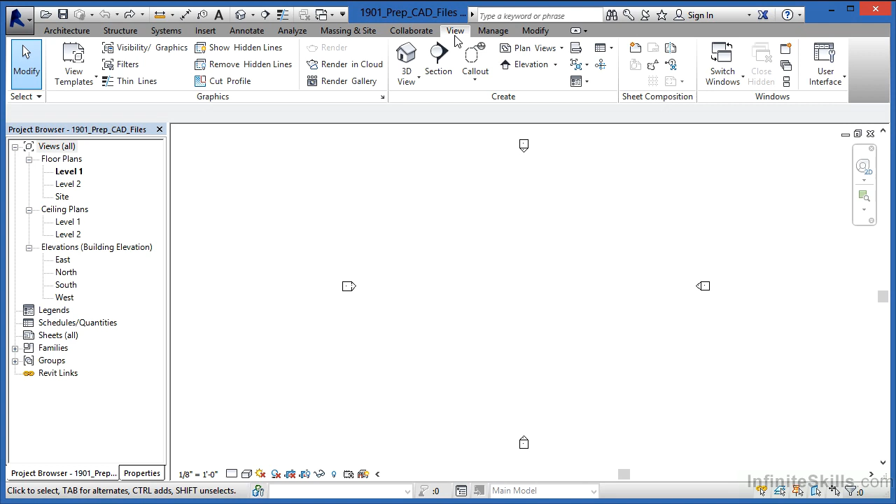Now to accomplish this, you need to begin by creating that drafting view. Because it's a drafting view, we'll find that under the View tab on the ribbon by selecting Drafting View. It'll ask for the name of that drafting view, and that'll be the name it shows up under in the project browser over on the left-hand side. In this case, I'm going to call it a garage detail. It's not the most descriptive name, but it is accurate. It is a detail of part of the garage.

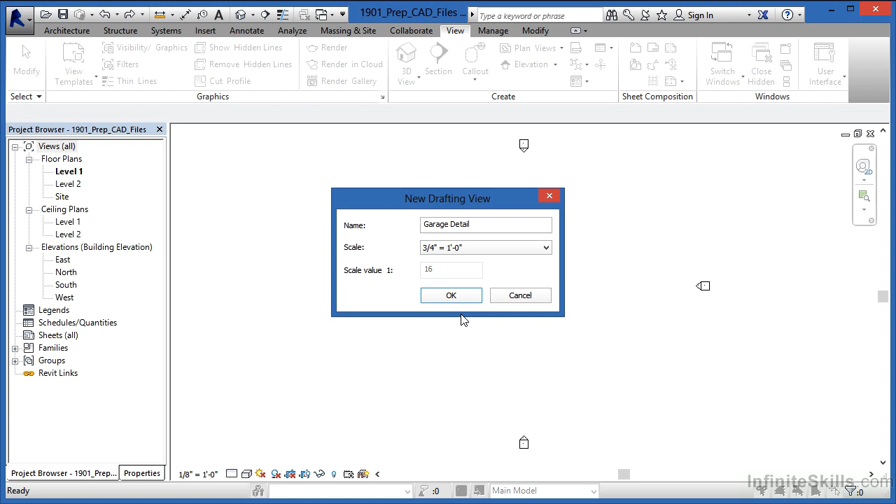Next, we have the scale, and I know that this is 3/4 of an inch equals a foot. And click on OK. It's now created a new Drafting Views category under the project browser, and if you expand it out by clicking on the little plus sign, you can see that this is a garage detail. It's now 3/4 of an inch equals a foot, and it's just a blank drawing area right now.

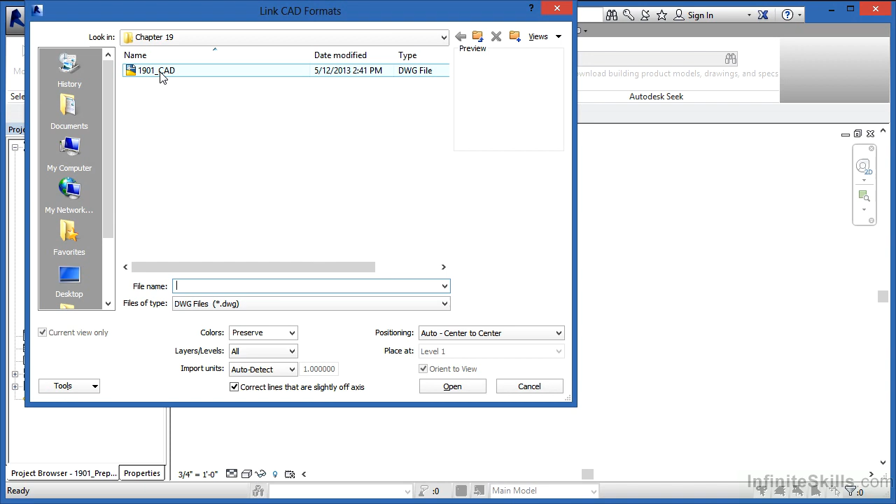To insert that CAD information, we come to the Insert tab, and we have one of two different ways we can bring that CAD information in. We can either link it in, or we can import it in. If you link it in, and I'll do this as an example, you'll then have the ability to select that CAD detail that you want to bring in. In this case, it's named 1901 CAD. From here, click on Open. Give it a few seconds to process.

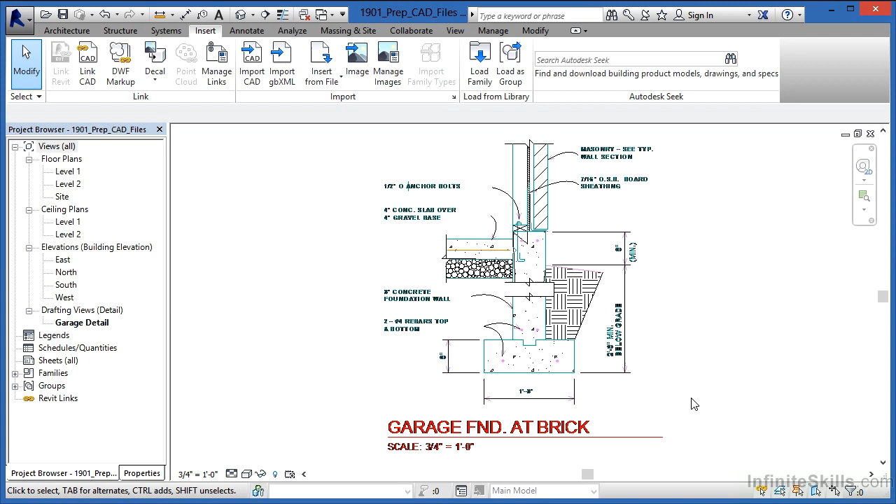The next thing to do will be to either type in the letters Z, E, or double-click really quick with the wheel on your mouse, and that will zoom extents so you can see that entire detail. If this is good enough, at this point you can place it in your drawing and start to print it. More than likely, you want to do some cleanup of this, and the reasoning is that this isn't really your typical Revit font. Most likely, your Revit arrows probably don't look like this. If you zoom in, you'll start to see some oddities like this little arc stops right here instead of coming all the way on over.

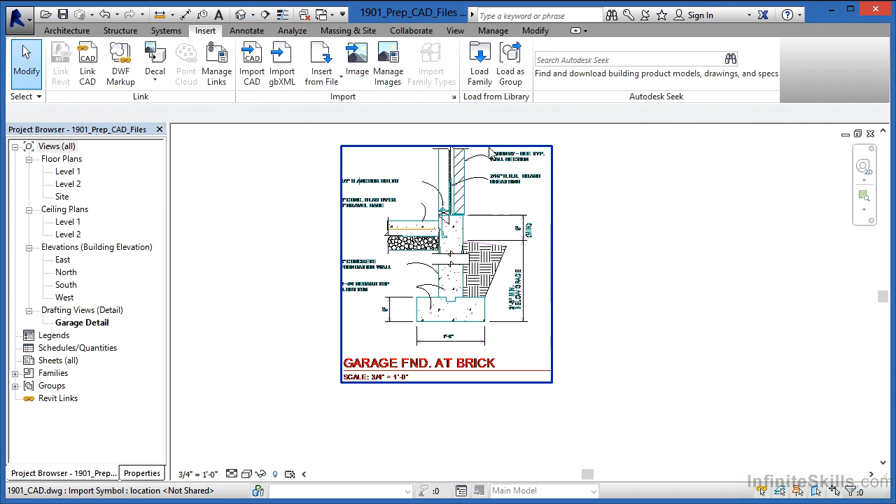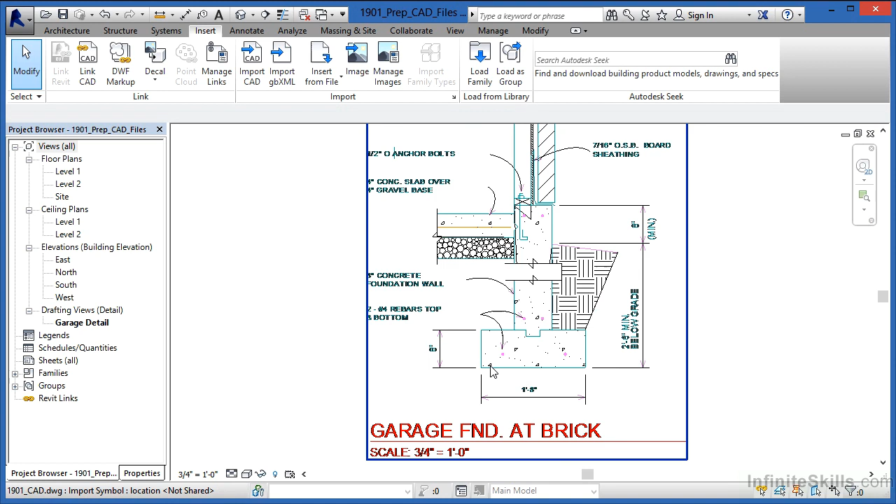So there's going to be a lot of cleanup that needs to happen in here, and really, if it's a linked file, it's difficult to clean it up inside of this environment. What you can do, though, is trace over a linked file, and you can use your drawing tools to draw lines by picking the endpoint of a line to the next endpoint of the line, and just start to sketch right over the top of it. Then whenever you're done, you can highlight it and click the Delete key on your keyboard, or just right-click and go to Delete in order to remove that detail.

At that point, because you traced over the top of it and put in your text, you'll have an exact copy of that detail just redrawn inside of Revit. The nice thing about doing that with the link is that you know that you get all the lines exactly right. You don't have to do much measuring. It's just click, click, click, and fill in the information without having to be amazingly accurate, because the accuracy is already drawn for you inside of the original CAD detail.

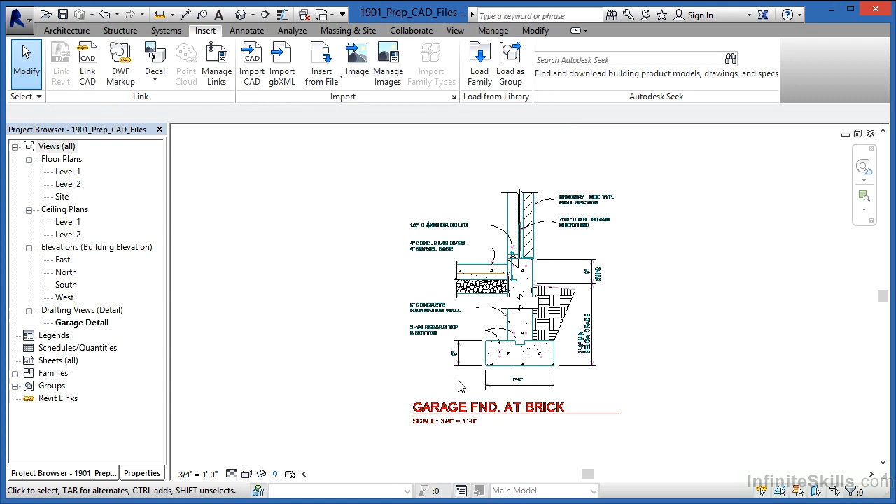Now, the other thing that you could do instead of linking it in and then being forced to just trace over the top of it is you can import the CAD information in. If you do this, you can select that CAD file just like we did before, and click on Open. In this case, we didn't have to zoom out because we already were zoomed out. If I select it, it looks exactly the same as it did before, but we now have something special, and that's called Explode. If you select where the word Explode is, there are two different options. One is Full Explode, and then there's Partial Explode.

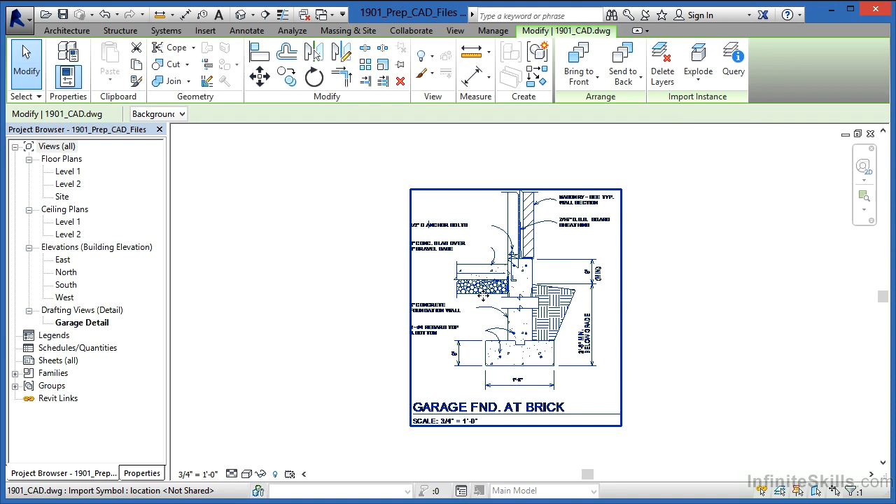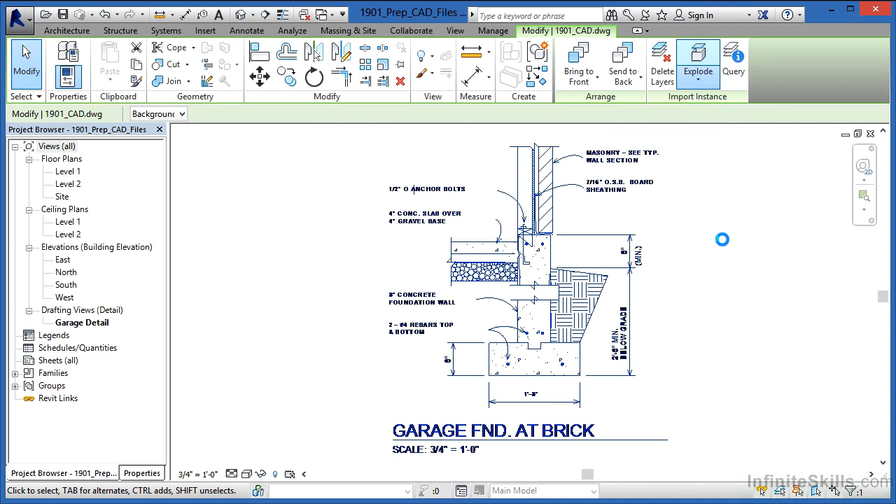The Full Explode will explode everything. And when I say everything, that includes down to each and every line that makes up these circles in the gravel. It will explode these patterns here, so each of these little tiny lines that make up the concrete symbol would be individual lines. In short, it'd be a big mess inside of this detail. On the other hand, the other option is a partial explode. You'll get a warning message, and you can close that warning message down.

What the warning message said is that this originally came from a drawing that had three-dimensional information in it, and you can't bring that three-dimensional information into a drafting view. Are you okay with that? And by clicking on OK, it just got rid of that three-dimensional information.

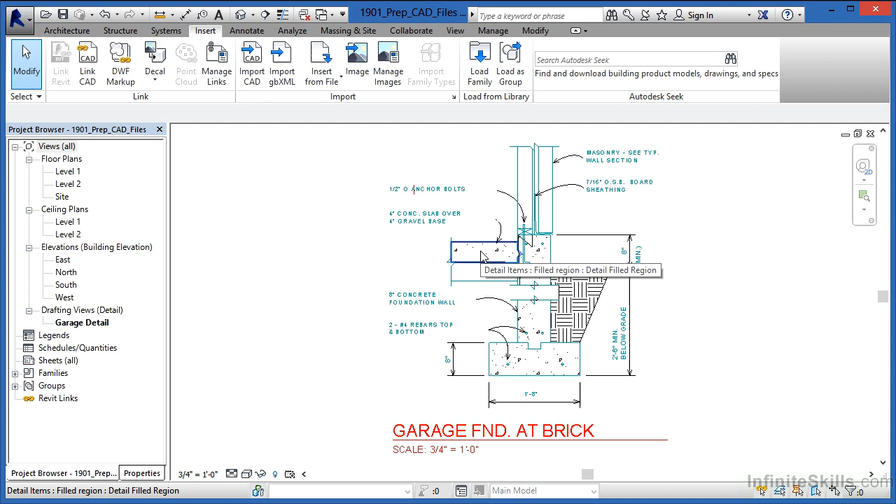Here, we can see that if we highlight over any of these pieces, things like the title can be highlighted, the dimensions can be highlighted, and I'll call it a hatch pattern because that's what it originally was in AutoCAD, but it's now a fill pattern in Revit. It's all one piece. It's not individual pieces of concrete, for instance. There is a problem, though. Let's take a look at this arc.

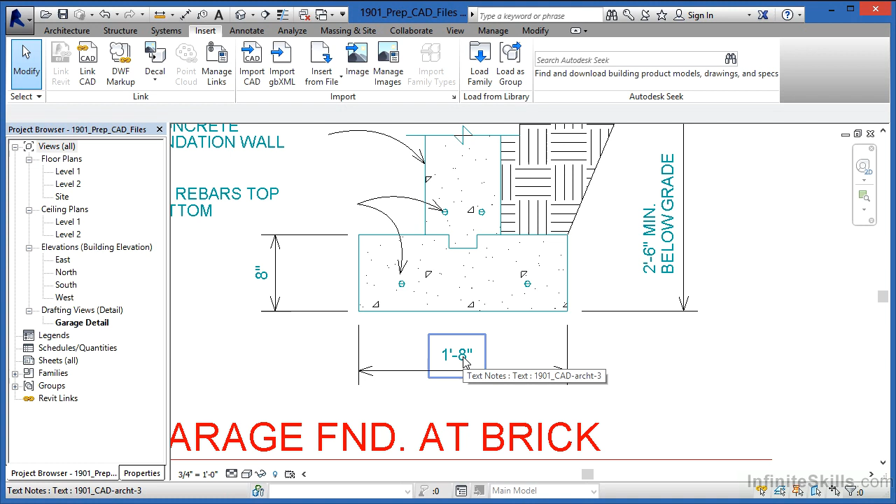Each individual lines and not a true arc. This arrowhead is no longer an arrowhead. It's line work that looks like an arrowhead. Your dimensions are the same way. Your leaders. Everything that might be part of a dimension that was brought in from that AutoCAD environment is now an individual line. Even the text, which would have been multi-line text, may be showing up as being just a

single line text. Now, one thing that you can do is select on any of these pieces of text, come in here to your Properties dialog, and then change it on the Type Selector list to be an appropriate size font, such as 3/32. And you could do this throughout.

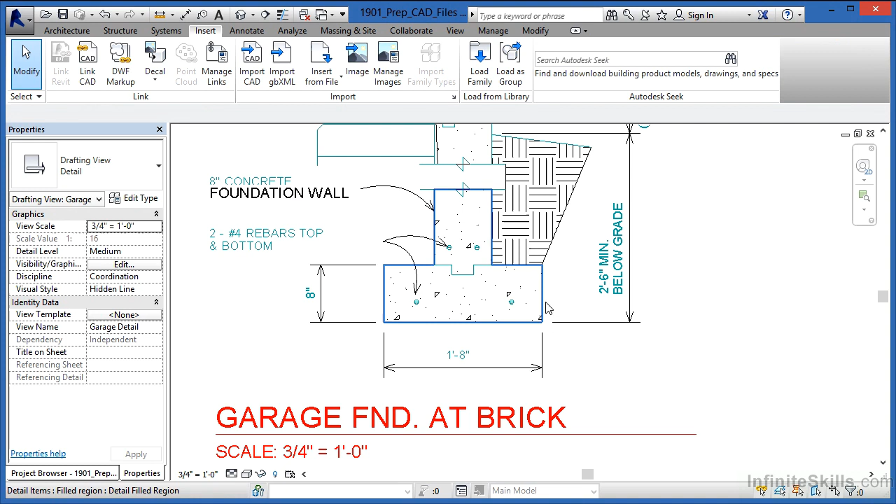The only problem is, as you come in and you window around these things, you pick on the different text sizes that you want to have, you start to see how these get to be spaced a little closer than what you'd like. So you'd have to take the time to pull these apart, move these to the right locations, so that they start to have the right look and feel to them.

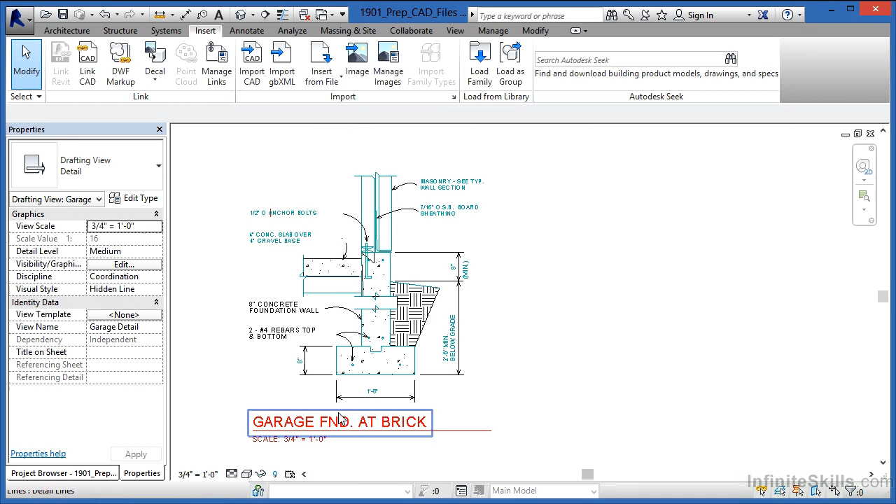As far as I'm concerned, the only thing that's really good about that procedure is the fact that you do get these individual lines as well as the fill patterns, and they're still available to you. It means that you don't necessarily have to recreate such things as the fill patterns. You don't have to redimension each and every one of these because they're already dimensioned appropriately.

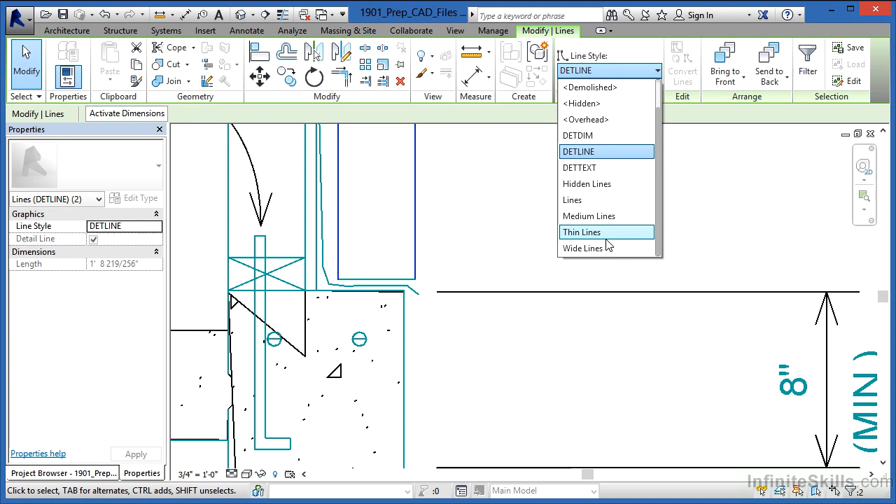All you need to do is select on each of these items and then pick where you have your different detail lines and tell it that you want it to be a certain line or certain line weight. For instance, and I realize this is a little bit odd, I'm going to pick wide lines for this, just so you could see a fairly dramatic difference here on the screen. See how that's a lot thicker now?

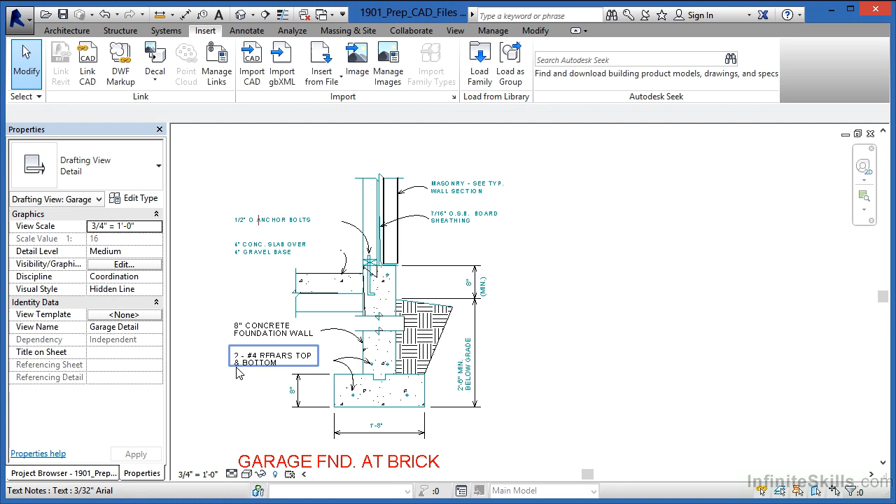And you could go through this on all the lines that make up this detail and give them the appropriate line weights without having to redraw it from scratch. But the things you will need to redraw from scratch are going to be the text, the arrows. Otherwise, it's just never going to look right, or you'll be spending half your day trying to move these around, when in reality, you could have come in, just used your text commands from underneath Annotate, and just renoted the entire thing in a matter of minutes.

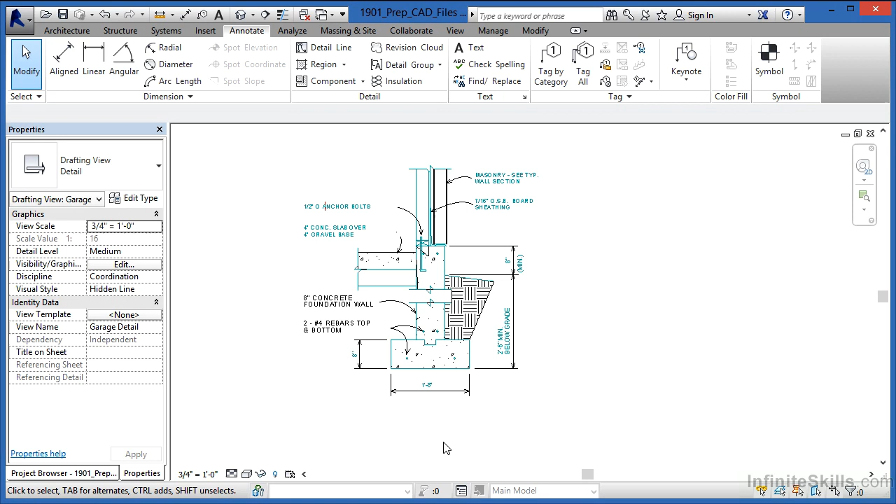One other thing that you should do, if you bring these in, you should always get rid of the title that's associated with them. And then you can just hit the delete key after you've highlighted on those entities. The reasoning is, this is a drafting view. Because it's a view, the second you pull it onto a sheet, it'll automatically have a title generated for itself.

So, to kind of wrap this up and talk a little bit more about what it is that we did, if we want to bring in your CAD information, you probably want to have them in a drafting view. Second, you may want to just link it in if you want to trace over the top of it using your drawing commands found underneath Annotate.

Also, if you instead decide to import it so you can use the existing line work without having to redraw it, remember you're going to have to highlight over all this stuff and then delete it, get rid of it. Get rid of your dimensions, get rid of your text, and probably renote the entire thing so that it looks right and meets your company standards.

Both of these processes sound like they take a long time. The reality of it is that for most CAD details, you can usually completely redo it in less than 5 minutes. The only issue with that is that when you bring in your CAD details, your CAD information, just remember you should always get rid of the CAD information because it's not going to meet your standards. And the second reason is that CAD information can also lead to instability issues in your Revit models.

Autodesk once said that about 85% of all the issues that they have inside of the software program, if that Revit file doesn't want to open, if Autodesk gets them, they will strip the AutoCAD information out. 85% of the time, that's what's causing the issue inside of the Revit file.

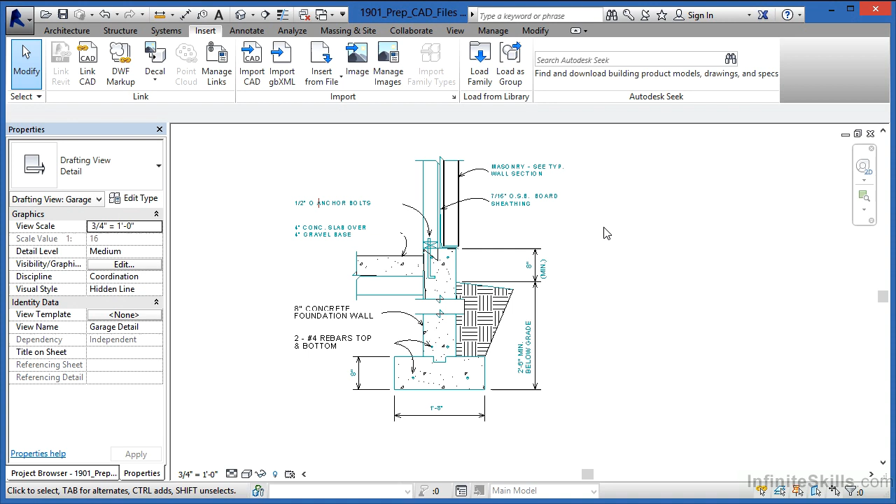So it gives you a little bit of a background as to bringing in this CAD information is fine. Tracing over it is fine. But it makes more sense to get rid of it or select on individual pieces of information and turn it into true Revit entities because it'll look better, meet your standards, and also add to the stability of your Revit design.